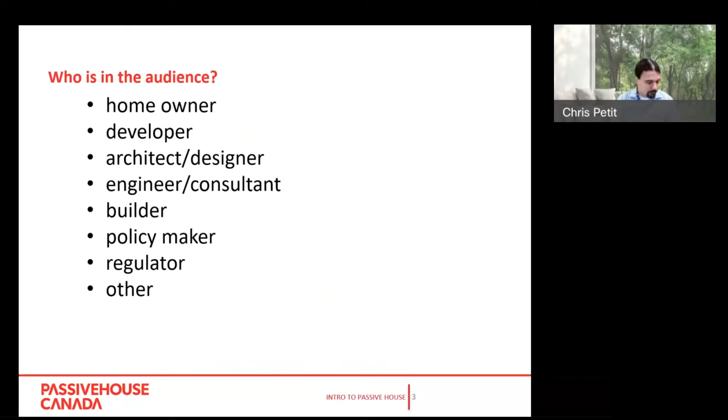I was a little bit curious. I know it's a builder's breakfast, but I was trying to figure out who's in our audience. If you want to put that in the chat, that's useful. Also, I'm just trying to gauge people's background and familiarity with Passivhaus, so I can try to gauge my presentation accordingly. So if you can do that, I'd appreciate it.

So just a little history, the Passivhaus standard comes out of Canada. There's a history of pioneers with the Saskatchewan Conservation House that was in Regina in 1977. Super insulated building, airtight, compact shape, innovative heat recovery ventilator, solar gain through the glass. A lot of the principles that are the standard today for Passivhaus were in this building during that time, due to the oil crisis.

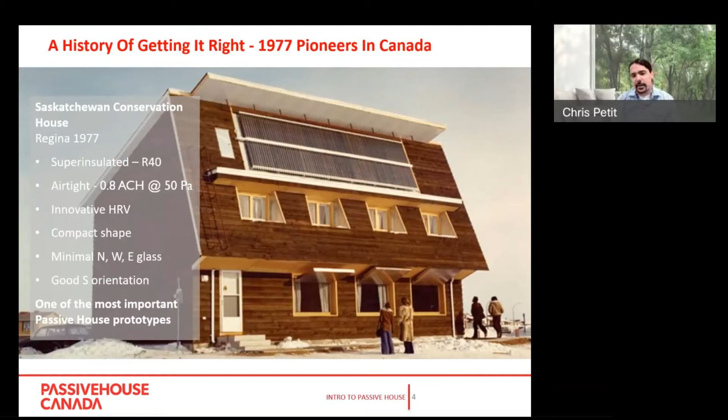And then later that was taken up in Germany. So they built their first Passivhaus in 1990 using the same principles. Both of these buildings still stand and are still occupied. We get excellent data about their performance, and their continued performance has met up to the same expectations as when they were originally built.

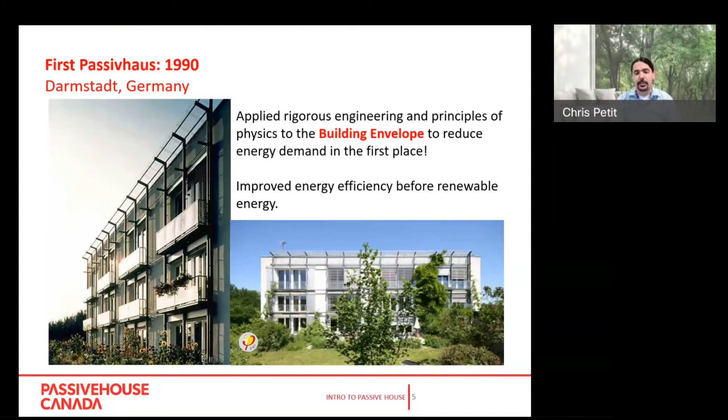Just a little bit of background for carbon emissions. We consume 40% of the global energy use with buildings, and we contribute to about 30% of the global greenhouse gas emissions. So the built environment has a large impact when it comes to global warming, climate change.

So what we're trying to do with Passivhaus is really look at space heating. We can really drive down the energy use in space heating, and you're getting about a 90% reduction of energy through the principles of Passivhaus construction, and I'll go into that a little bit more as I go through the presentation. We also try to do more efficiency in water heating, appliances, lighting, and there may be cooling, but it's not required within a Passivhaus.

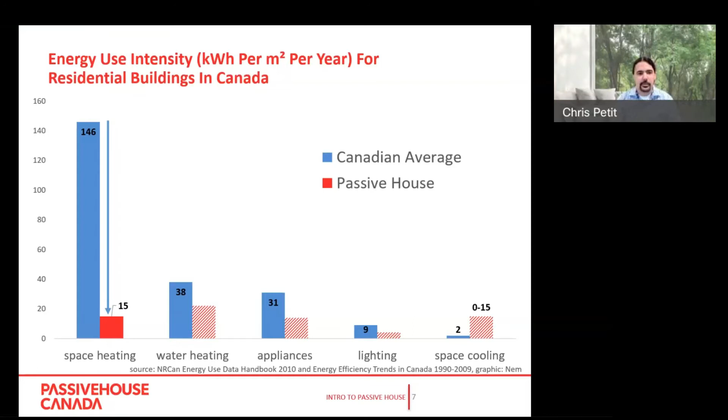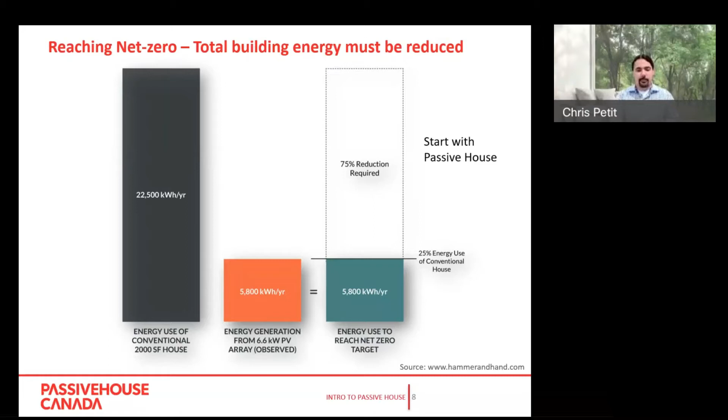So generally, a conventional building would take about 22,000 kWh per year. What we're doing is reducing that to get to net zero energy targets, and when you do that big of a reduction, it's a lot easier to then cover that gap with renewable energy. Renewable energy is quite expensive, so it makes sense to conserve first and then add renewables when you're trying to hit net zero energy targets.

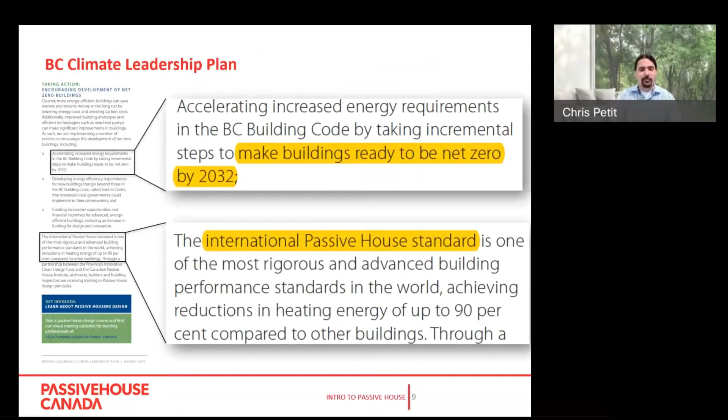So the BC Climate Leadership Plan, we're trying to make buildings ready to be net zero by 2032. The International Passivhaus Standard is a great way to do that. We want to make sure that you have the knowledge and experience to get there so we can meet these targets. Once again, the Passivhaus Standard is a great way to achieve net zero energy and then use that renewable energy to the best of its ability.

So some of the benefits of passive houses are that they provide healthy indoor air quality and temperature. There's a lot of comfort and quiet because of the airtightness, so you don't hear that construction noise or your neighbors, giving you that sense of privacy. There's a substantial reduction in energy use and operating cost. There's simple and durable systems for heating because you're reducing the size and complexity of those systems, and then finally, there's just peace of mind.

You can have resilient buildings. So if you have things like power outages or whatnot, the inside temperature is going to be maintained through that period of several days, so you don't have that same concern when you have those kind of emergencies.

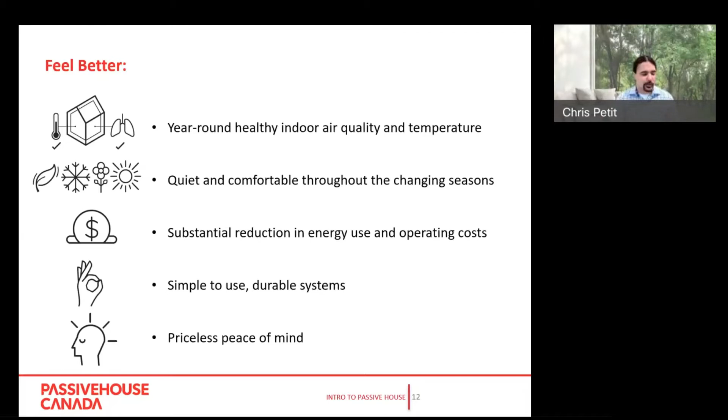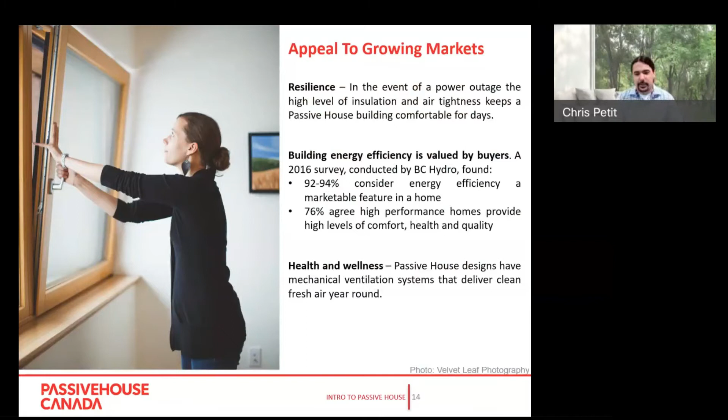So once again, health and wellness, resilience, and comfort are notable. The icing on the cake is the energy efficiency. A lot of people come to Passivhaus for those comforts and health benefits, especially with COVID. We're looking at making sure we have good ventilation systems and healthy environments. And of course, there's the benefit of saving energy and saving money on energy bills.

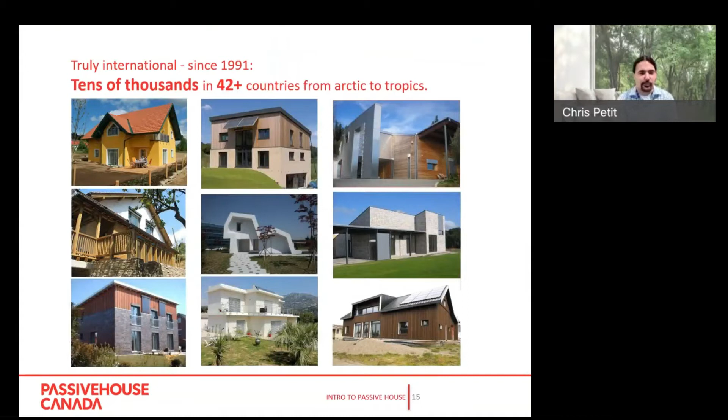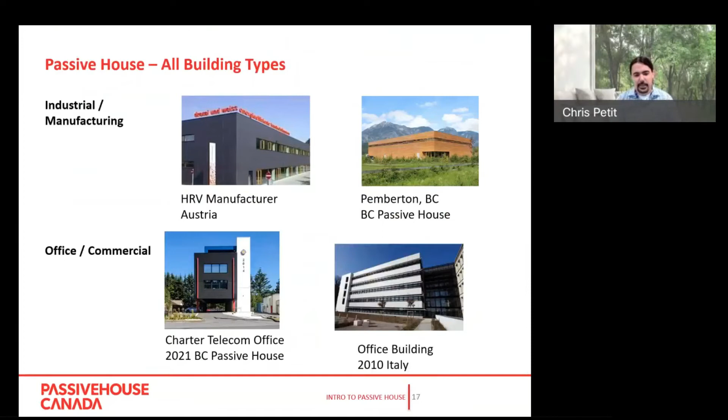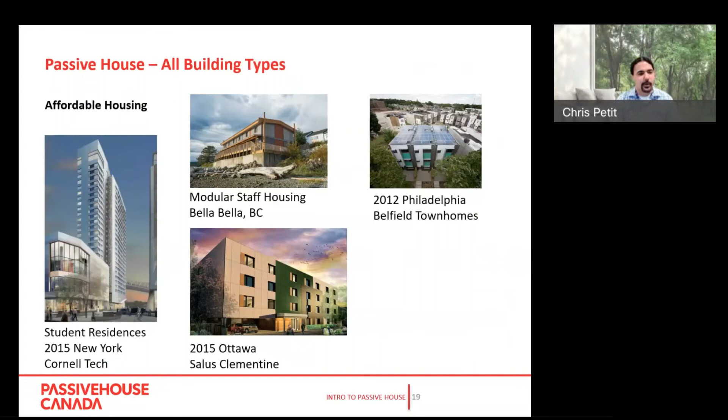But there are also student residence towers in New York, modular staff housing and prefab construction, affordable housing in Ottawa, as well as in Philadelphia. So there's all kinds of different building types. There's even a hospital that's being constructed, research labs, brownstone retrofits, assisted livings, supermarkets, pools, fire halls. You get the idea that it spans a large range of projects.

So the basic principles of a passive house, there's five of them. We super insulate the envelope, we do airtight construction, there's thermal bridge-free design, and I'll explain that a little bit more. High quality windows with solar orientation - we really want to take advantage of the sun. And finally, ventilation systems with heat recovery. When we're exhausting that air, we want to capture the heat out of it, so when the fresh incoming air is coming in, we're preheating it with that outgoing air.

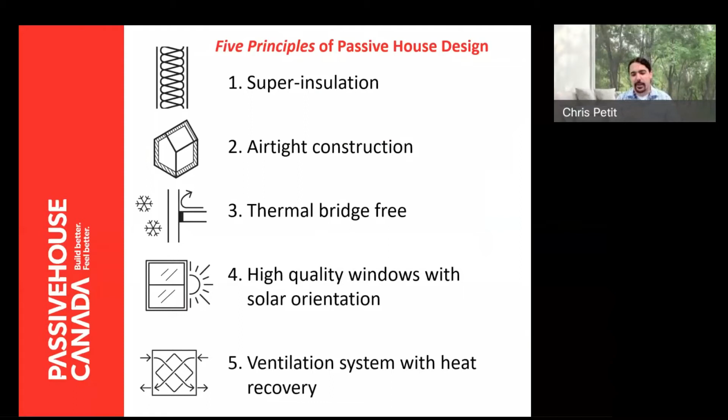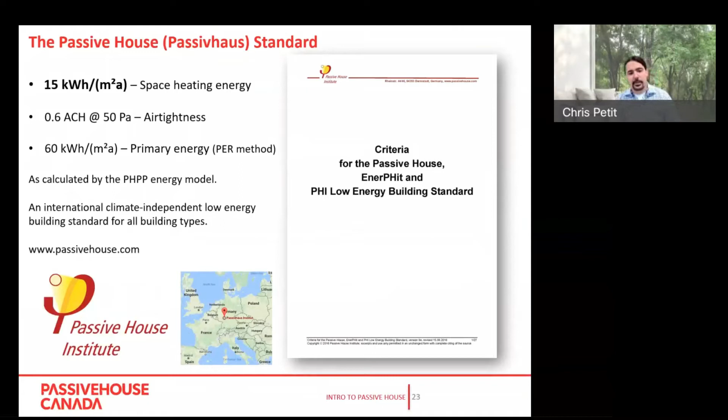So the passive house standard has some metrics: 15 kWh for space heating, 0.6 ACH at 50 for air tightness. There's a primary energy target - I'm not going to go deeply into that today, but we'll hit some of the points. The energy modeling software that's used is called the Passive House Planning Package. You may hear that when you're working with an energy model or other design professional that's doing the model for the building.

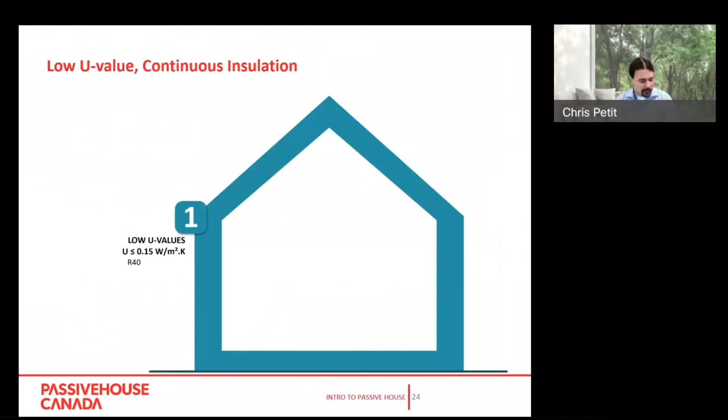But once again, we're looking at low U values, below 0.15 in general, so you're generally around R40. We want to reduce the heat loss in winter, reduce heat gain in summer, and make sure we have very comfortable interior surface temperatures. So basic principle: the more surface area there is, the more heat loss there is.

So when we take a compact shape, there's less surface area to volume ratio. If we take a piece of that envelope and then remove it and move it to a different section, we're increasing the amount of wall area. And if we take it out of a chunk here, we're having even more wall area and more potential heat loss. So you can do these types of things, but then in general, you're probably going to have to increase efficiencies elsewhere - so this is not an optimal form.

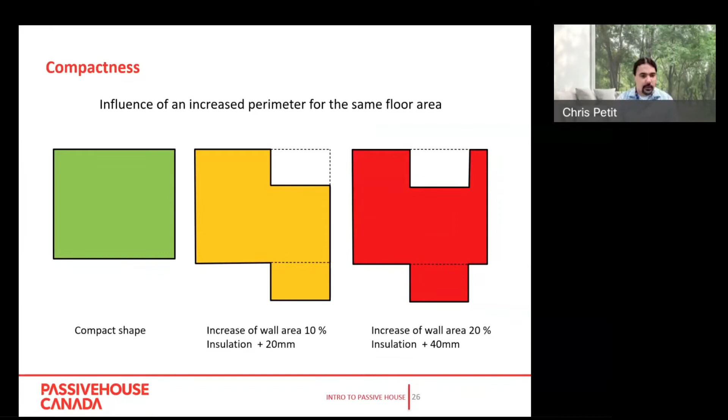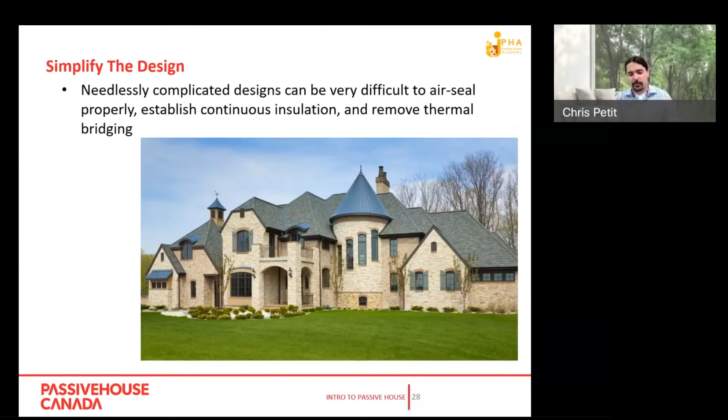This can also be challenging as well. We want to keep the thermal envelope and the air barrier as simple as possible, and then you can still do decoration and ornamentation inside and outside of that thermal envelope, but we don't generally want to puncture it or create a lot of undulations in the envelope in general.

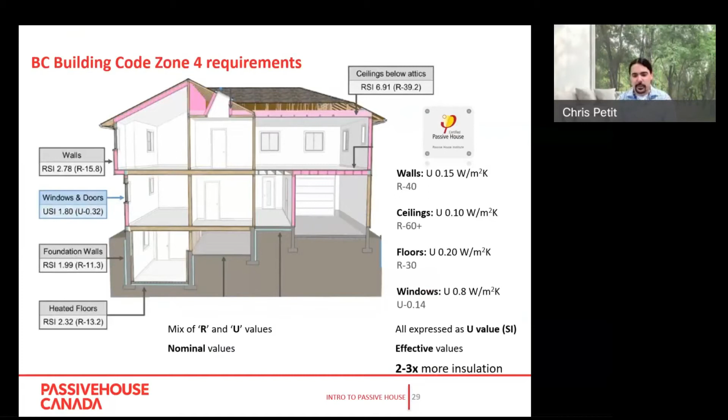So there's kind of two different ways to add more insulation to the walls. You can either stuff it in the walls or wrap it around. And generally the common ways of doing this are a double stud wall or having exterior insulation strapped to the outside.

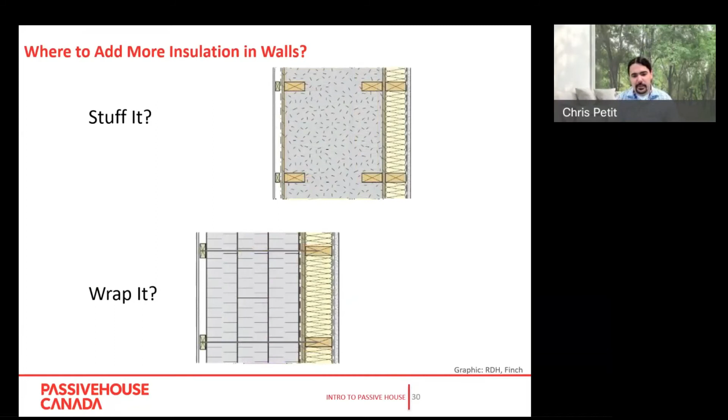So there's a lot of different ways we can do this, and my co-presenter will go into his projects in more detail. So interior insulating, thickening up that cavity with the double stud, or having a deep stud cavity with a service cavity as well. That way we're not puncturing the air barrier with wiring, plumbing, etc.

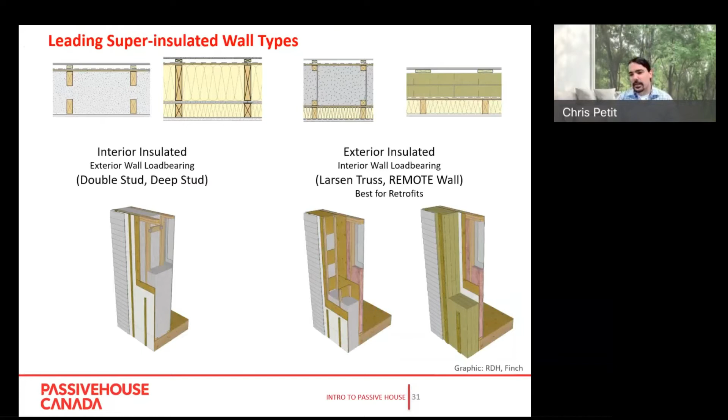The other way to do it is with Larsen trusses for exterior insulation, or adding exterior insulation with cladding attachments.

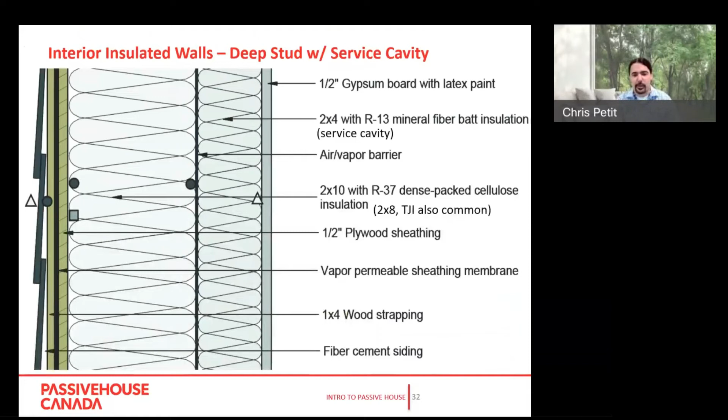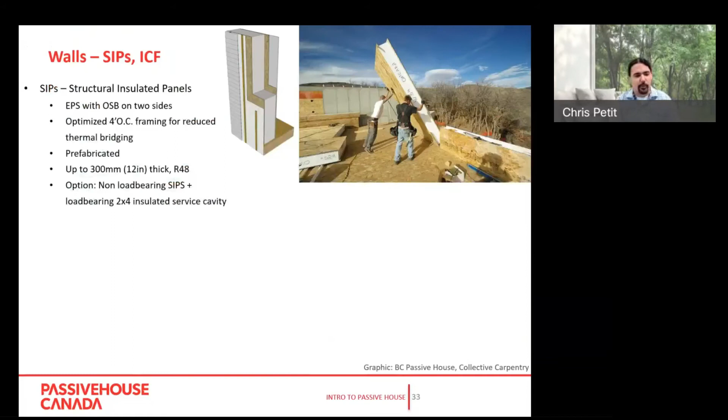SIPs is another option. We see that happening in conjunction with insulated concrete forms as well for foundation walls, but it can also be used for above grade.

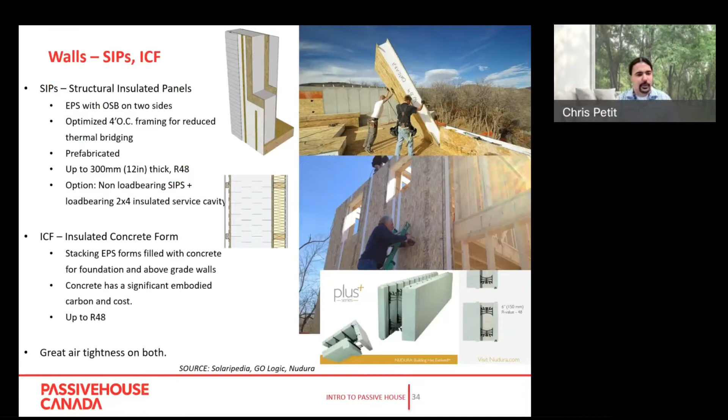So the next principle: you have a nice thick thermal insulation, and so that's keeping you warm. You're wrapped in a nice jacket, so you're wrapping that building with a nice layer.

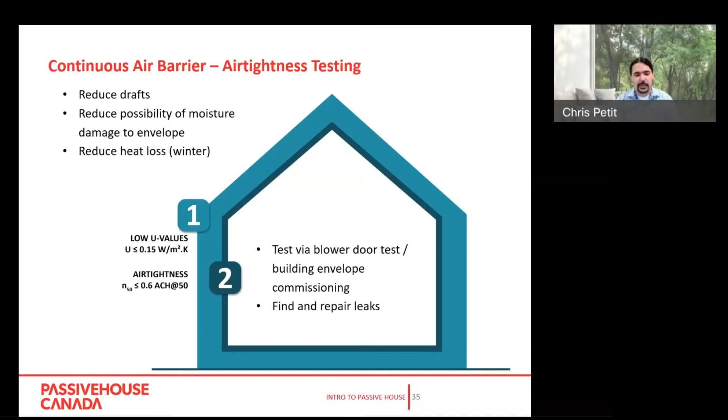Keep it warm, and then once again we want to make sure it's airtight, because if we have air going through that envelope, the insulation is not being effective. So we're reducing drafts, we're reducing the possibility of moisture buildup in the envelope by making sure the building's airtight as well, and we reduce heat loss in winter. We test this with a blower door test and general building envelope commissioning, finding and repairing leaks during the construction process. So the air barrier is quite important.

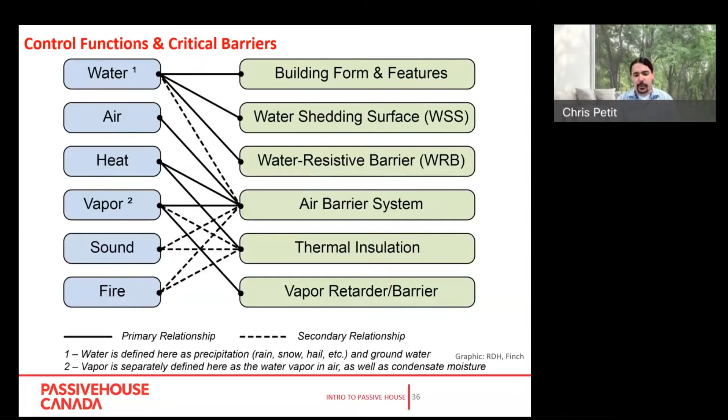It hits all of these different aspects: water, air, heat, vapor management, sound, and fire. So we like to pay close attention to that, and it's recommended that in general there's a person responsible for that on site.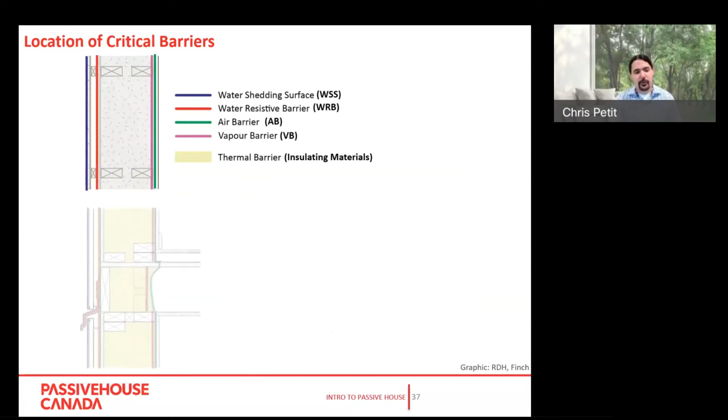It's also important to really look at where the critical barriers are and making sure they're continuous. So while you may not be designing where those are located, you're responsible for the construction. We want to make sure there are complete connections between the different layers and that everything is functioning adequately.

The next principle is thermal bridge-free design. So what is a thermal bridge? We're looking at how we reduce heat loss through the different junctions of the building, and the junctions are where they're most vulnerable to moisture buildup. So we really want to pay attention to these. I would say that the Passivhaus standard, the details and how things come together and are constructed, are what set it apart from others.

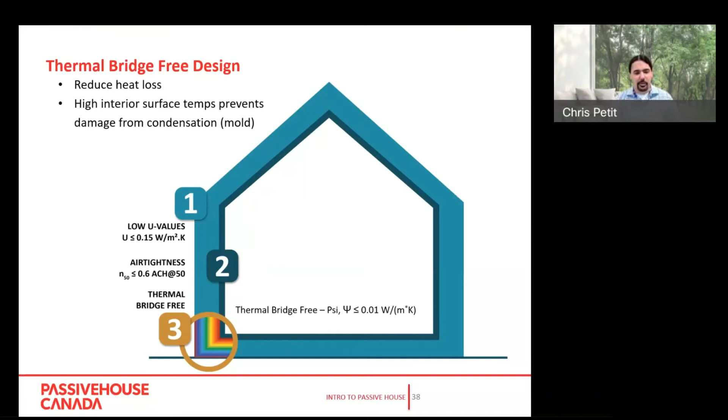So what is a thermal bridge? Anywhere that there's an interruption in the insulating layers. It could be a change of thickness of the insulating layers, and there's also anywhere there are jogs, creating geometric thermal bridges. This occurs because of the way energy modeling happens, since exterior dimensions are always used, so there's overestimating and underestimating that occur. But generally you have to take into account these thermal bridges.

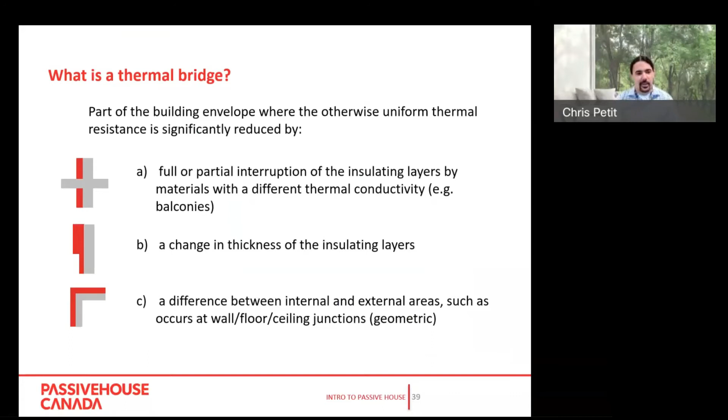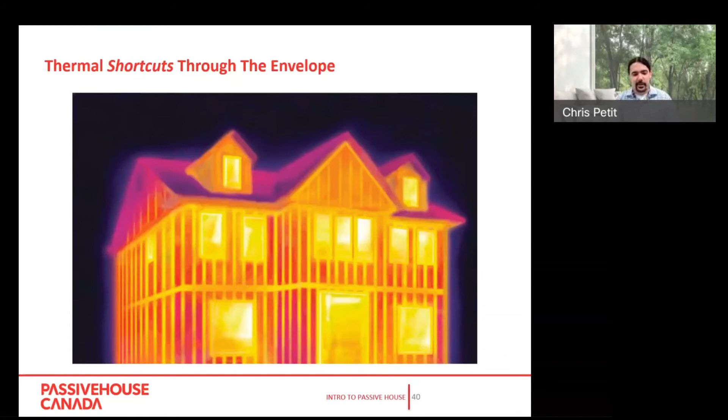We all know thermal bridges look like this, generally like the studs coming through insulation. So even though that wall is insulated, there's more heat coming through those studs than through that insulation.

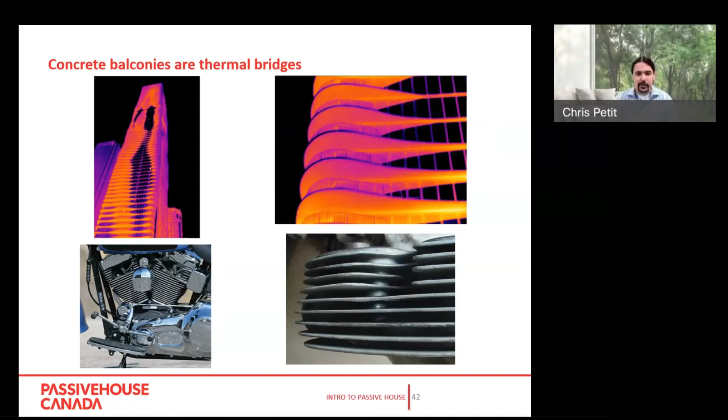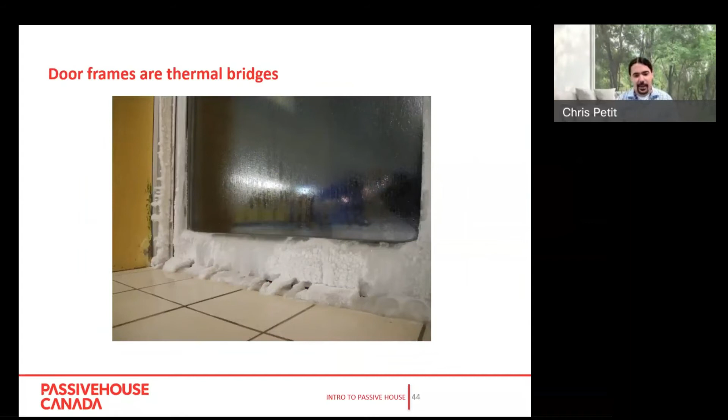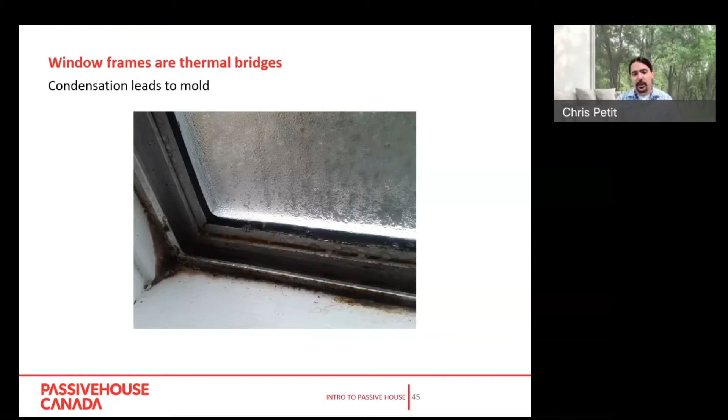Door frames are also thermal bridges. You can see the moisture buildup and ice buildup here, and the mold, so we can have health and wellness issues if we aren't taking care of how we're installing the windows and making sure they're properly installed within the insulation layer, to get the best performance of the window and also avoid these types of problems.

The world's most energy efficient buildings are also healthier, more comfortable, affordable, and contribute to a sustainable future.

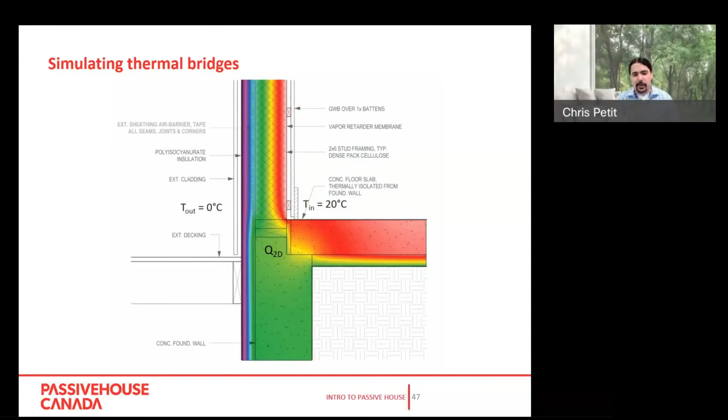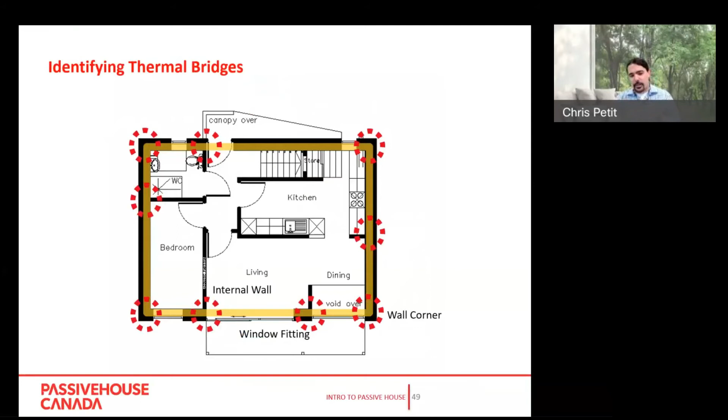So we do thermal bridge modeling to assess these junctions. I'm not going to go into detail, I just want you to be aware of it. We're looking at all the different junctions in a building, how the corners come together, the windows fit in, etc. So even though it's nice to gauge where the thermal envelope should go, the designer, and then also in construction, you're paying special attention to these details.

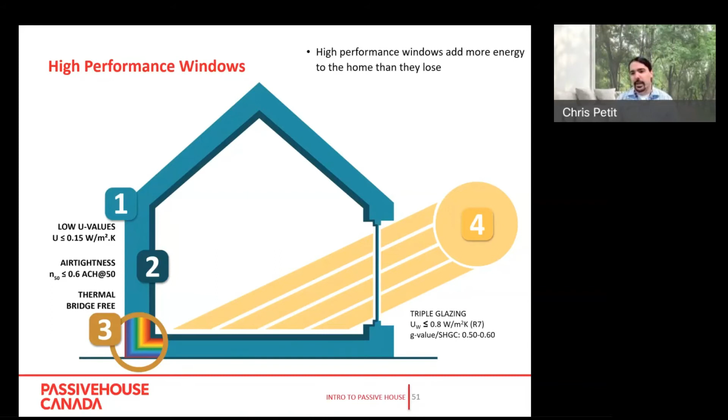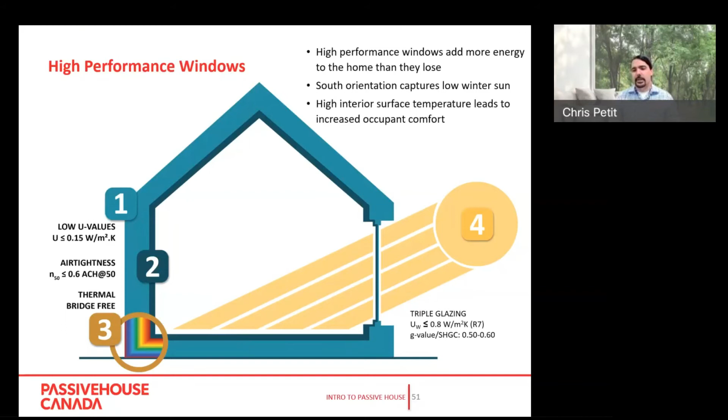The next principle is high performance glazing. We have triple pane glazing that's performing at less than 0.8, so about an R7. It's quite well-performing windows that we want to use, and generally the windows can be the weak part in a building. So it's really important that we take time and not only pick good windows, but also install them well. If we orient them correctly and they're designed well, triple pane windows can actually be a positive instead of an energy loss, which could be really helpful to the design—it's the only part of a building that can act like a battery, capturing heat when we need it in the winter.

How do we get that kind of performance? We have 3 layers of glass, insulating fills between those layers, and different types of coatings. We have thermal spacers that help reduce conduction through the window, and insulation within these cavities. There are also really nice airtight gaskets to help make sure we're not getting leakage through the window. All of these different points help with performance and also comfort in general.

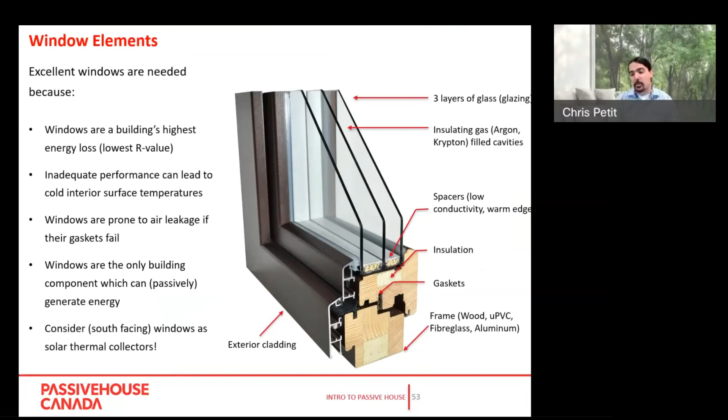There are different U values for different parts of the window. The center of glass is generally less of a place where energy is actually lost in a triple pane window. It's actually the frame that is the weak point, and then also how it's installed within the building itself.

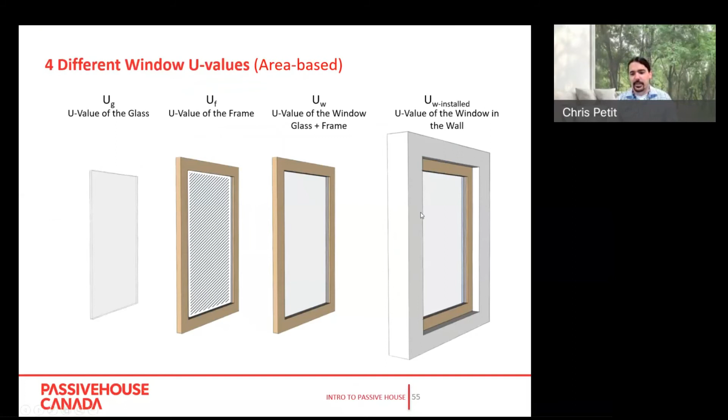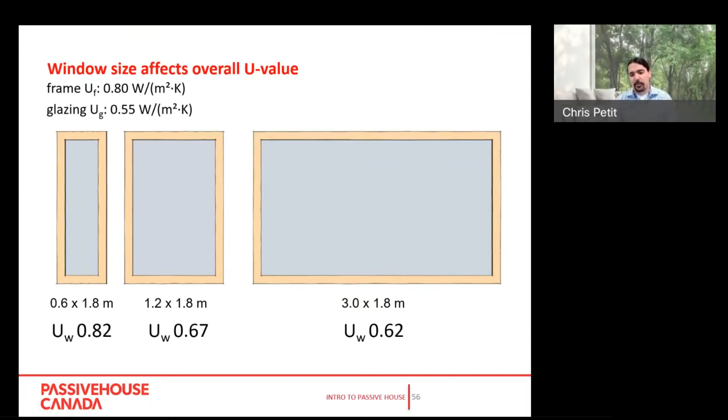If you look at these windows, where the center of glass is the same, you can see that the smaller window has a higher U value for the window because it has more frame. So using fewer small windows and a few bigger windows will actually be better in the end. The example on the left has lots more frame compared to the other example.

Having larger windows also provides challenges depending on how large you go. If they're quite large, you might need a crane, which has its own logistical challenges and costs associated with it. Also, if you go too large, there'll be steel reinforcing in the windows, which could also degrade performance. So there's a balance and a sweet spot to find for your projects.

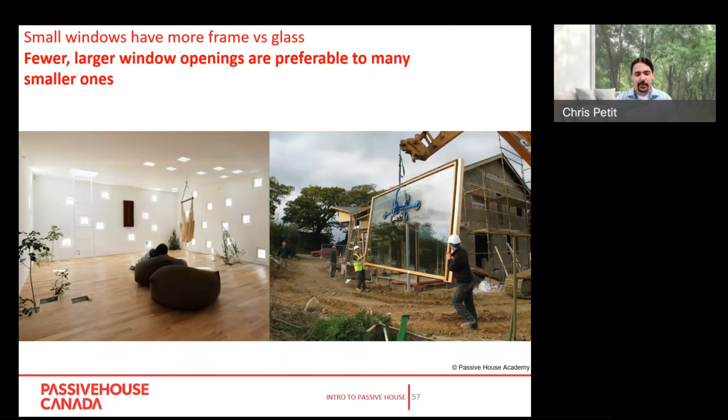The insulation, once again, it's recommended that the window sit within the insulation layer. Otherwise, if you place that window outside of the insulation layer, you're actually degrading the performance. So you're spending a lot of money for a high performing window, and then you're cutting the actual performance of that window if it's not installed in an optimal way. That's part of that detail aspect of Passivhaus that's important.

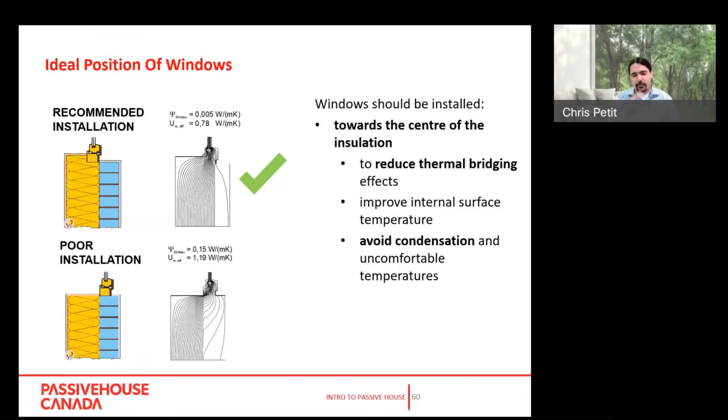So if you take care of the details, generally the rest of the project will work out in performance.

The next part is mechanical ventilation. Once again, we want balanced mechanical ventilation with heat recovery. Nowadays, the heat recovery units are about 90% efficient, so they're really high performing. This allows continuous fresh air coming in, but without the penalty of energy loss.

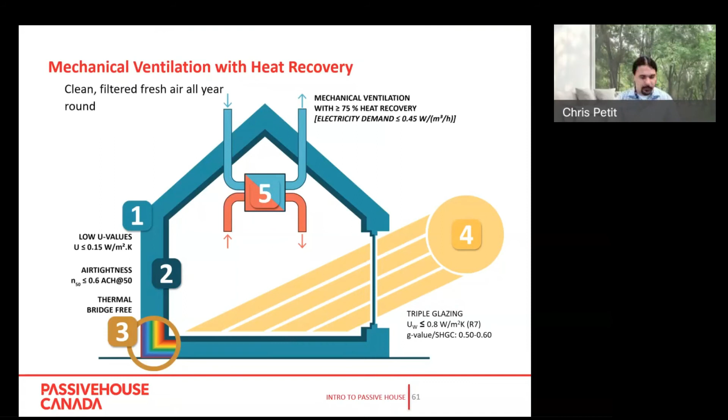It also comes in really useful during things like forest fires, making sure you have clean, filtered air, instead of having to open your windows. At that time you have to shut up the house, and having the heat recovery ventilator is useful for that, as well as for things like COVID, since there's no mixing of the air. There's a membrane in between that transfers the heat between the two streams of air.

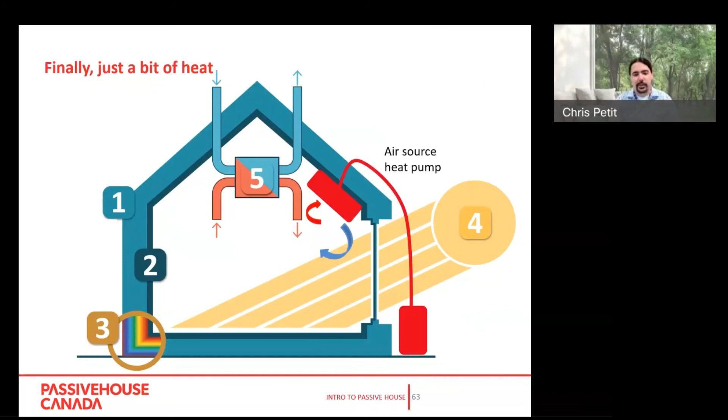Finally, you just add a little bit of heat. That can be done through an electric duct heater, but we're seeing more and more air source heat pumps being used. So that's kind of the basics of the heating side, but there are strategies that need to be involved.

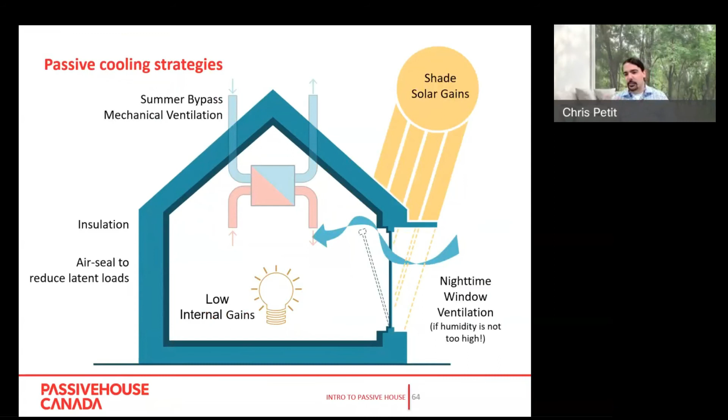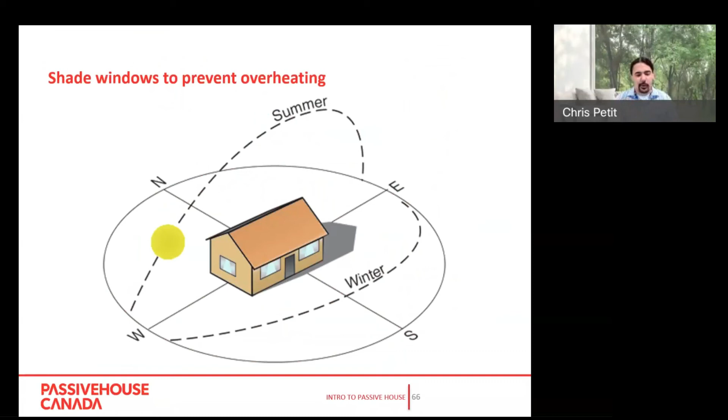You don't want to overheat the space, so making sure you have low internal gains as well as solar shades is important. There's a criteria that you can't overheat more than 10% of the year, with 5% being the recommended value. Because we know how the Earth is tilted, and the sun seems to move lower in the horizon, we can take advantage of that and make sure our overhangs are designed correctly, and then use things like shading devices. External shading devices are being used more and more.

So why certify? A Passivhaus is not the same thing as a Passivhaus-like or inspired building. Having that quality assurance is really important. The only way to know if you have a passive house is to go through the process, making sure the energy model is checked, and that the construction is done well, etc.

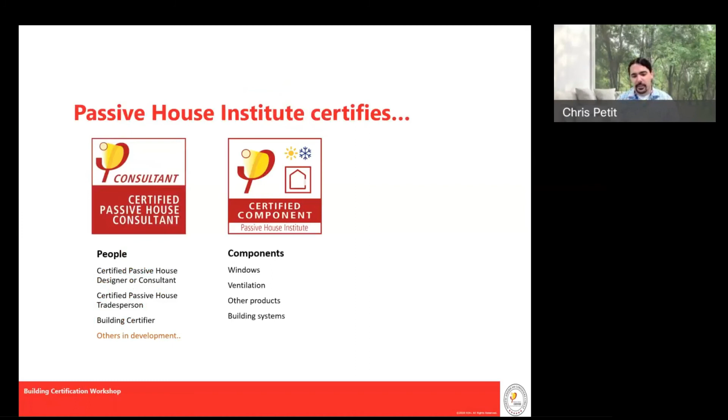There are different things that are certified. There are people certified as designers, consultants and tradespeople, and there are building certifiers who help check the work of the designers and tradespeople. There are also components certified, like windows and ventilation systems, etc. And finally, buildings are certified.

There's the passive house building, the EnerPHit, and low energy building certifications. EnerPHit is for renovations. There's criteria for these three different building standards.

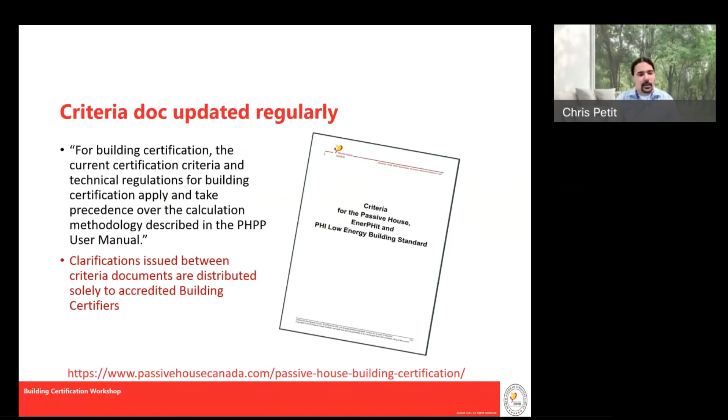You can find it at the link below at passivehousecanada.com, and these are updated regularly for clarifications and the like.

If you're looking to hire a certifier, there's the North American Certifier Circle, which has a plethora of certifiers to choose from, and you can also go on that same website I gave you before to look for a certifier.

Generally the info you're providing includes the working plans, a brief description of the assemblies and mechanical systems, the preliminary energy model if you have it, who's responsible for the energy model, the link to the certifier, the schedule, and any known challenges you might have.

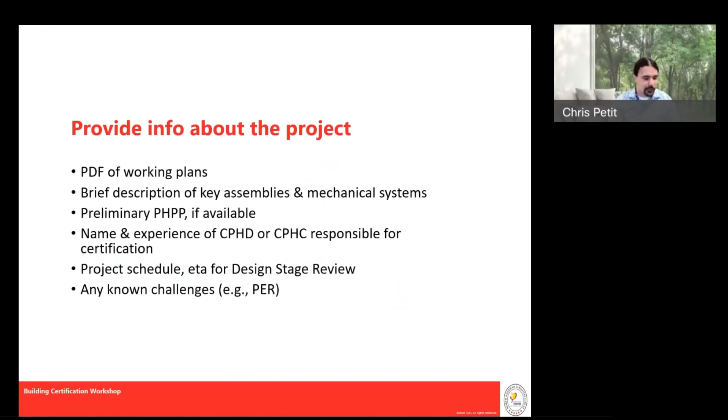Generally there are four stages to the certification process. There's the pre-submission, which is a consulting phase during schematic design, then the design stage review, which is important to make sure the building as designed will meet the standard. Then there's the construction stage where you as the builder will be working on construction, with some testing involved during that time as well as at the end.

Generally, people are submitting their projects for design stage review. That's the best practice. Then there's the final submission, where there'll be the post-construction assessment.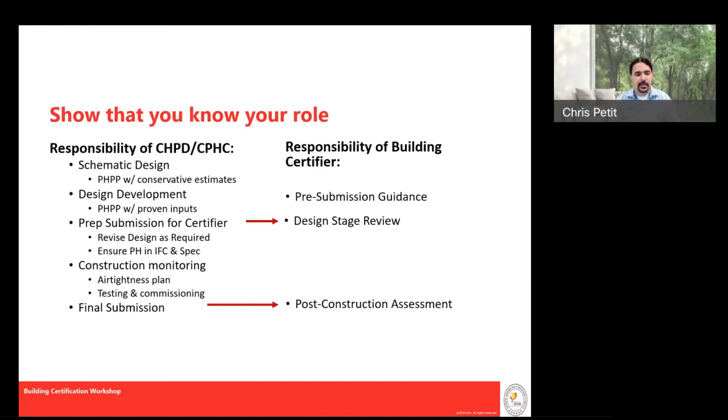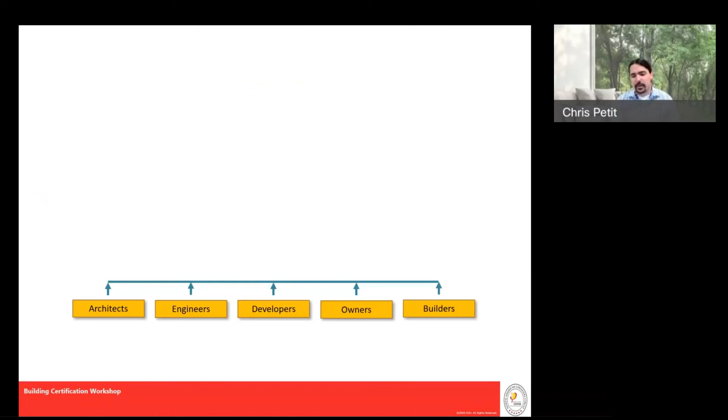So Passive House is a team sport. It takes all of the different professions working together to make a passive house. All that information is in conjunction with a consultant or designer. Sometimes a member of the team, like an architect, engineer, or builder, could be the consultant or designer as well.

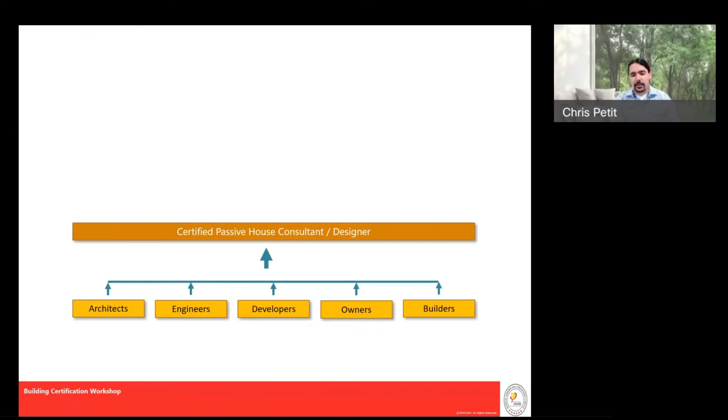And so there's certifications for that. All that information then goes to a certifier who reviews it and does the final sign-off. Finally, the information is given to the Passive House Institute, where it will be signed off and a certificate issued. If you like, your building can also go into the database and be recognized internationally.

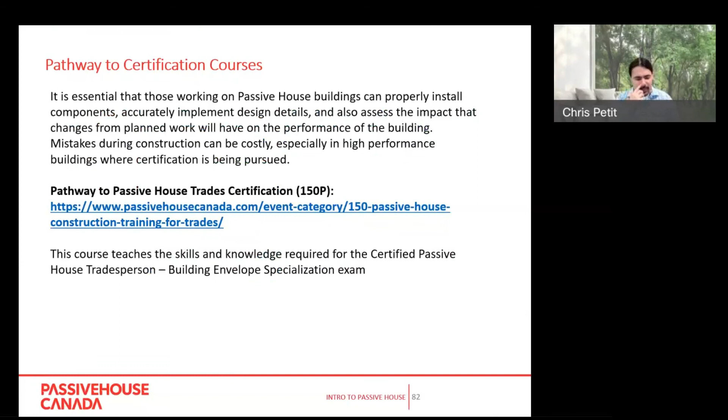So how do you get up to speed or become a certified professional? We offer courses. There's the pathway for trades through Passive House Canada. The next one is coming up in April, so you can look into that.

There's also a pathway for design professionals, which has three courses bundled together. Please check those out as well.

So once again, just going into the four stages in a little bit more detail, and then I know I'm running over time, so I'll be handing it off shortly.

Pre-submission guidance is really important, just to make sure you are hedging all your bets. Especially if it's your first project, go to a certifier early and make sure you know what's involved and what you need to do. It'll save you a lot of trouble, time and money.

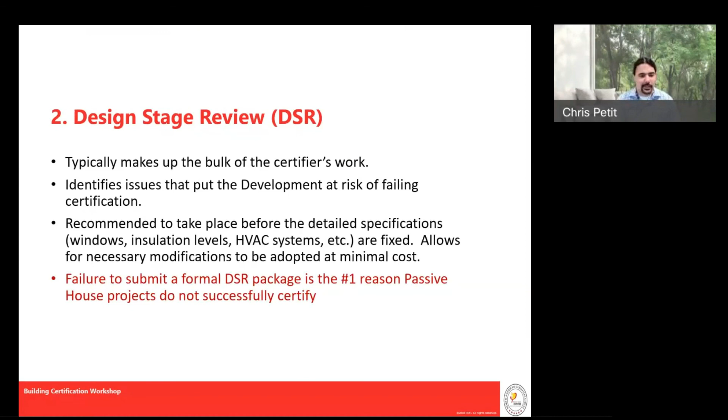Design stage review, making sure the building is going to meet the standard before you start constructing, is really helpful and important. Failure to submit a formal submission is the number one reason projects don't certify.

So this is the process. Generally there's a submission, then some feedback from the certifier, and that process happens cyclically until the issues are resolved and a design stage assurance letter is issued.

So then the construction happens. Generally there can be site visits and reports issued depending on the complexity of the project and the scale.

It's really important to notify your consultant and your certifier if any change orders are happening. Changing out different components that may have a different performance level will definitely impact your ability to certify.

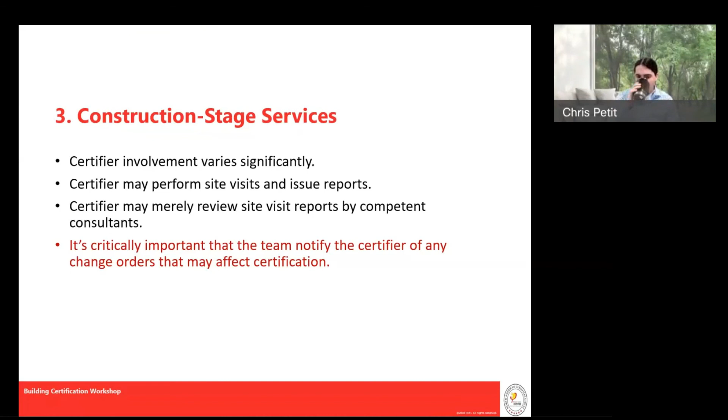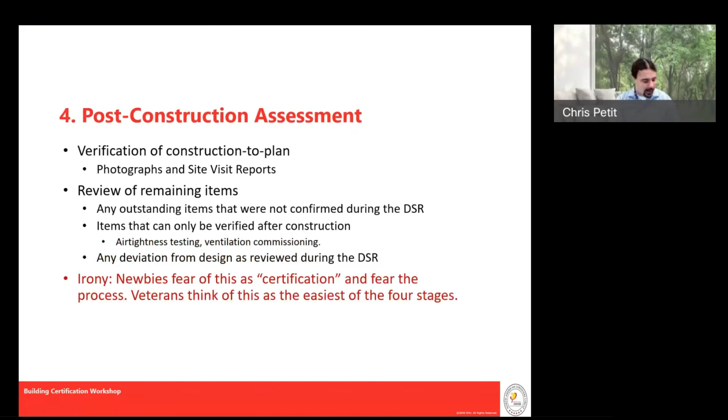And then finally, in post-construction, there are photographs and site visit reports, and any remaining items. Here's a checklist of different things to take into consideration, like airtightness testing, ventilation, and occupancy training.

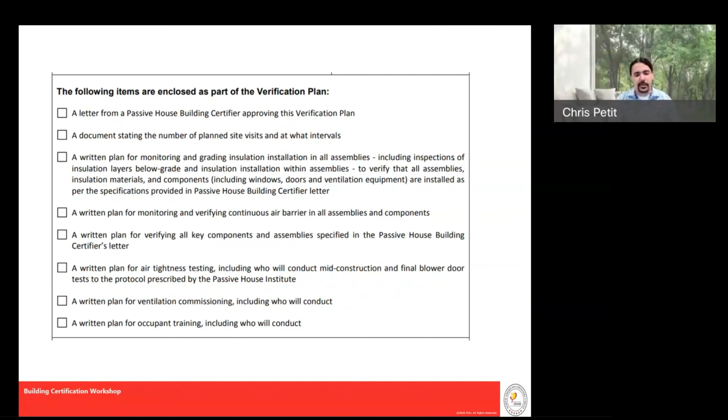For photographs, it's really important to have tape measures to show the amount of insulation. Representative samples of the different specs of the actual materials used is really important. Here are examples of different details and how they were sealed for airtightness and insulation.

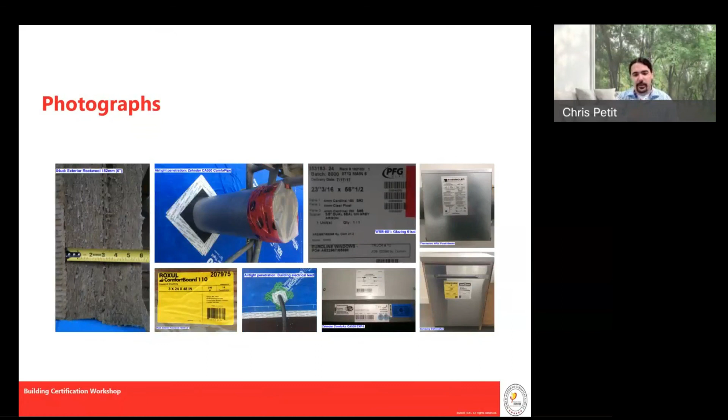Finally, airtightness testing is really important to hit the number 0.6, using a pressurization and depressurization test. You basically take the average of those two results to determine whether you meet the standard. It's also important not to leave this to the end of the project.

You want to do it intermittently to see where you are while the air barrier is still accessible, so you can do any plugging of holes as you go.

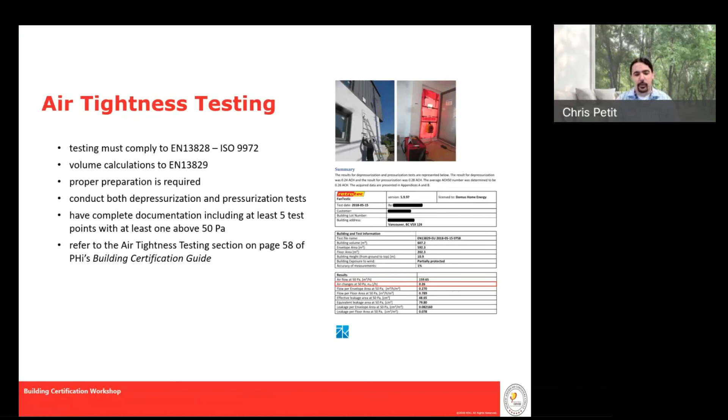Ventilation commissioning is really important. We want to make sure we have balanced ventilation between the incoming and outgoing air, and that we're getting the right points for intake and the exhaust air at the right levels as well.

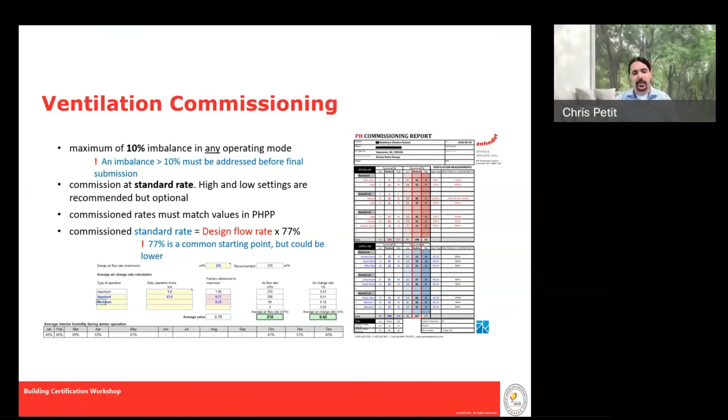And then finally, there are declarations where the construction manager signs off saying that they've built the building as designed, and lists any deviations from that design.

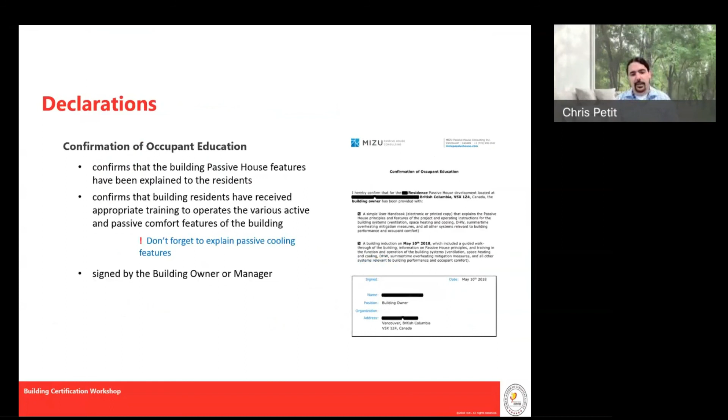And then finally, there's an occupant education component. We make sure that the residents know how to operate the building and maintain it. This can be a small booklet that goes into the maintenance or mechanical room.